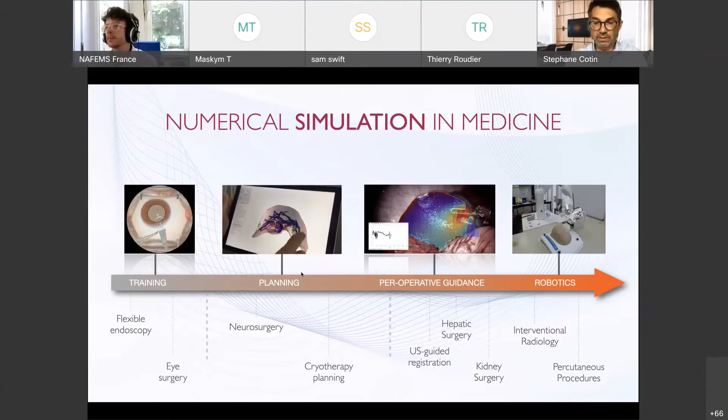Here are some examples of what we do. I took a subset of our research just to show that these different topics can take different shapes and forms depending on the clinical context. But the key is that in many of the applications and problems we try to solve, the main problem we're dealing with is soft tissue biomechanics.

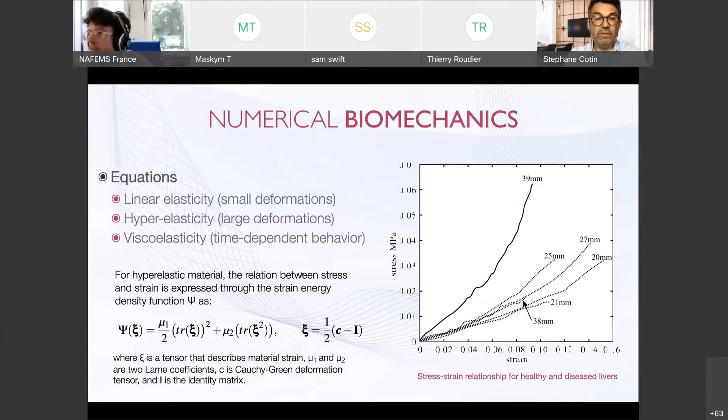Since we are trying to provide guidance in a clinical context, we want to be as accurate as possible, meaning we need to use complex biomechanical laws such as hyperelasticity, sometimes even visco-hyperelasticity. These models need to be parameterized for a particular patient in most of the applications I described, for planning and for guidance. They also need to be as fast as possible, because computation time is key since we always need to be real time with a user in the loop.

Since we're dealing with partial differential equations, our numerical method of choice is the FEM method, where we discretize the domain, usually a complex domain, in the finest possible way. We've tried different strategies in terms of what type of elements to use, but we always face the same dilemma: on one end we need a fine discretization to be as accurate as possible with numerical errors, but on the other end we need to be as fast as possible to meet the real-time constraint.

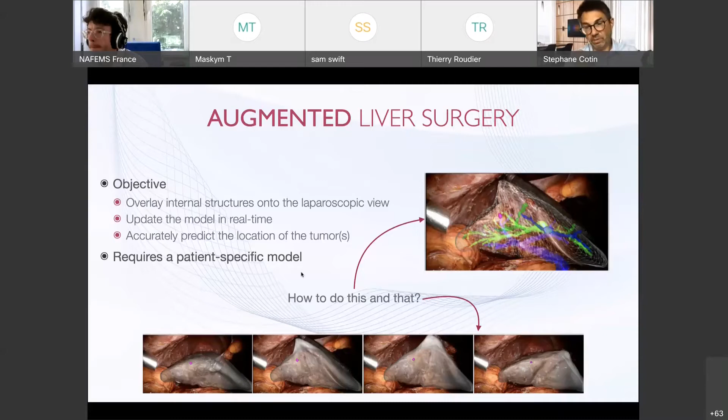That means we need to deform the preoperative model using a very fast finite element approach, and also use information from the image to make this deformation fit what we actually observe. Of course, this requires a patient-specific model to be as accurate as possible. So it really fits the definition of a digital twin, where the idea is to use data from sensors—in our case, most often images—to extract data and parameters for this virtual digital twin, update the model, and in turn use the model to provide added information to the clinician.

So it's basically creating a closed loop feedback where the model learns from data, and the data is in a way enhanced by the model. This link that the twin creates between the physical and digital world is really what we're trying to do in this case.

Since in our case images are our sensors, we need to extract information from these images, and it often comes from either artificial markers that we can place on the organ, or ideally natural texture patterns, or additional information like the contour, the silhouette of the organ.

The key is then to link this information coming from the image to the virtual model of the organ and the biomechanical model. What we used to do was take this information extracted from the images and use it to drive the deformation of the model. This is what's called registration in our field. But by doing so, we're basically applying virtual forces onto the organ that don't necessarily exist in the real world.

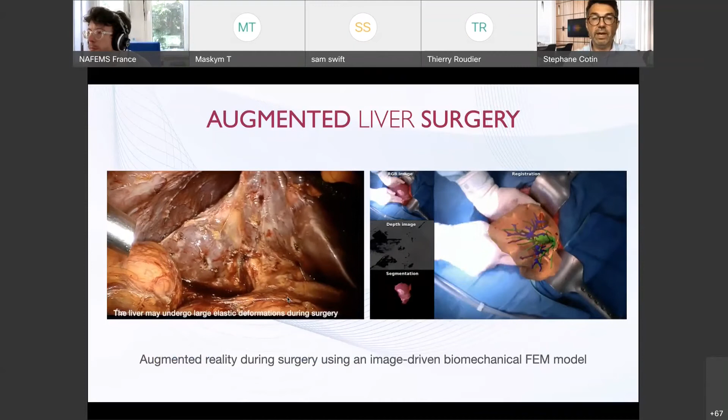Here these are two relatively old images, but videos of two different surgical contexts. One in the case of minimally invasive surgery, robotized surgery. The other one is in open surgery. In both cases, we're using information coming from the images to drive the deformation of the model, but also learn from these images a better parameterization.

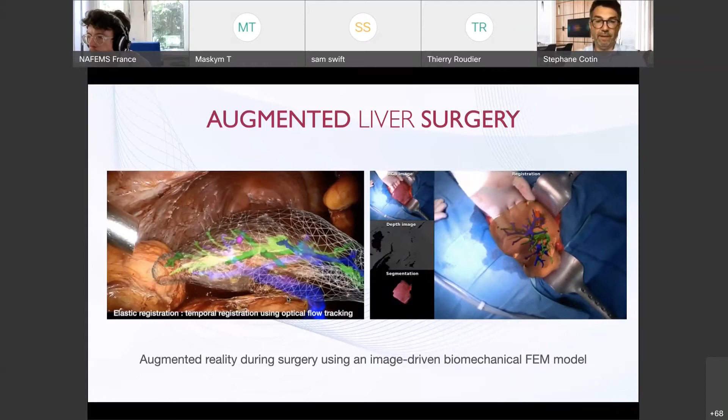Now this is all nice, and we've actually shown through some clinical studies that we can get accurate to about 5-6 millimeters when it comes to estimating, for instance, the location of the tumor. And it's relatively fast, but I would say it's not enough, because the clinicians we work with would like the accuracy to go below 3 millimeters.

And on the other end, if we also want to use these models in the control loop of a robot, we need the highest possible refresh rate of the model, so update frequency. So to try to achieve both objectives, about 4 years ago, we went for a different strategy where we wanted to replace the finite element method with a deep learning approach.

And the reason we chose deep learning is it's a good approach to learn complex relationships. It's also an interesting method because when we look at a particular network architecture that we chose, which already existed before, but we derived it from its initial usage, which is the UNet.

We realized that when we train through a UNet architecture, we're doing something similar to model order reduction. In the encoding path, which is basically the first part of the U, when you get to the bottom of the U, the vector of features we obtain is very similar to the reduced space we obtain with model order reduction. And then the decoding path basically expands back to the original dimension of the problem.

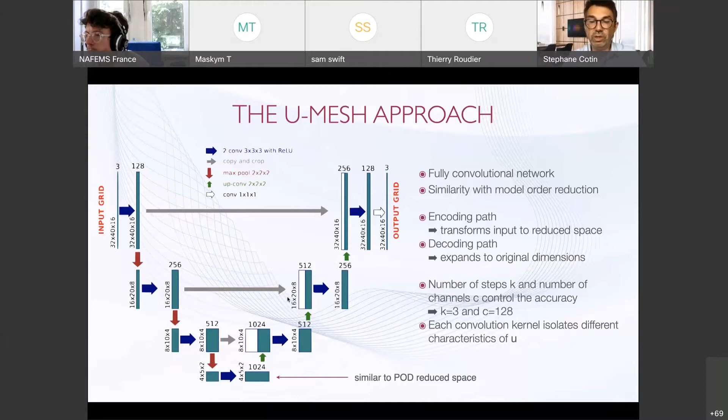So it's very fast, it's quite accurate, and it can really learn a quite generalized prediction in the sense that the only thing fixed in these predictions is the shape and the Dirichlet boundary conditions. For the Neumann boundary condition, you can pretty much prescribe everything you need. The network has been trained on a very large variety of external forces.

It's again very fast and quite accurate. But again, we wanted to go a step further and in particular improve both the speed and the accuracy of the prediction. And we went to a slightly different approach, first by using a different network architecture, which is a fully connected network, which I think gains a little bit in terms of computational performance.

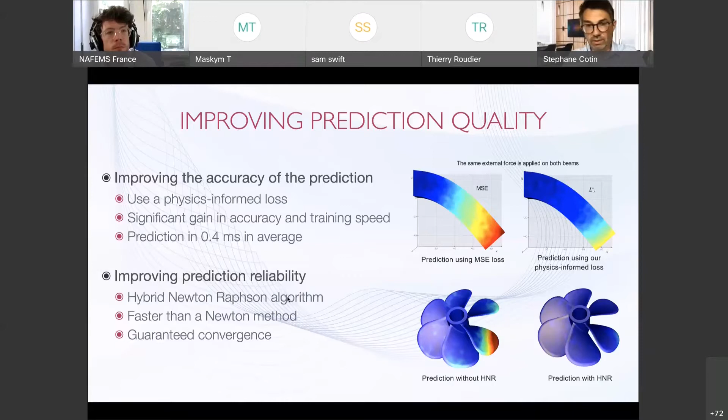So there's many things we can do with this, and this is just the beginning for us. I think that combining physics and deep learning is certainly a very interesting and exciting research field. In our case, what we'd really like to do is improve training generalization, so we can predict, for instance, the deformation of pretty much any liver, not just one liver, at least as a starting base.

We'd like to look at graph neural networks as they provide a more natural link with the finite element method. And of course, we also want to look at the dynamics of deformable models, even though in the applications I showed, it's not necessarily important.

But for a true digital twin, and for our applications as well, we really want to also learn from real data. In what I showed you, we're learning from data generated from simulations. And it's, of course, essential to have these patient-specific models that will also learn from real data.

So in principle, it's relatively easy to do this in other contexts because you can mix synthetic data with real data. In our case, however, although we have access to lots of images, for instance at the time of the surgery, these images contain very poor information. So our challenge now is to find a way of learning from, I would say, poor or sparse data, but in a way that the network still learns something and gets closer to the particular simulation for a patient.

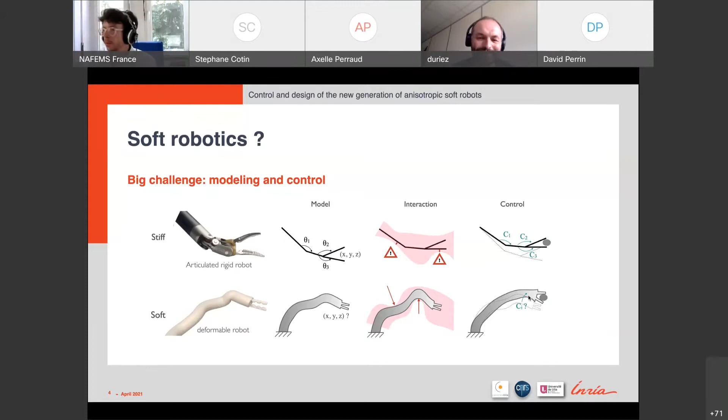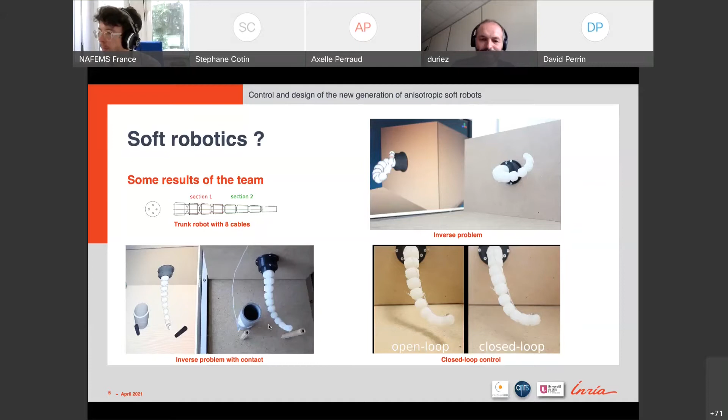Another big thing that we have done, I thought it was a video, but apparently the video is not working, sorry. But we have also developed a closed loop method. Basically you put a sensor at the tip of the robot, and you can avoid having any vibration on the robot using the closed loop.

Now I will talk more precisely on anisotropic soft robots. We are using a mesostructure to design the robot, a metamaterial that is basically printed. There are many examples of this metamaterial, and it's interesting for soft robots because you can control and program the flexibility of the material, and define the good stiffness and mass ratio. Even if it's compliant, you can have something compliant but with a low mass.

Whereas, for instance, the silicone that was used in the previous example has a lot of mass. And you can also create unusual mechanical behavior.

In this work, we also use 3D printed foam. It's a work in collaboration with a team in Nancy that developed this technique of printing this deformable foam. You can basically program the density of your material, but also the anisotropy. The inspiration is the structure of the inside of bones. So we said, okay, let's do soft robots with this material.

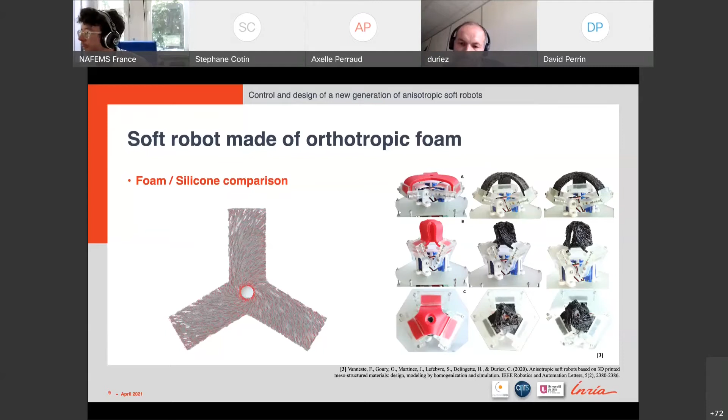Here we show that using the anisotropic foam, you can basically control the torsion of the top of the material forming the shape. You can see that it deforms, but how could we control that? So I will then go into the methodology that we are using in the team in general.

For this particular case of anisotropy, we are using numerical homogenization, and with this homogenization, we can construct the anisotropic constitutive law of the material. This was also done in collaboration with Nancy, where they already did some measurements on their foam to know the corresponding values for the anisotropic case.

We are using the transverse isotropy law, and based on that we can build a FEM model. This is standard for any of our robots. You can use the dynamics if necessary, but it's not always necessary — in that case it was not necessary. Otherwise, you have the external force, the internal force, and a set of constraints that we use for the actuation.

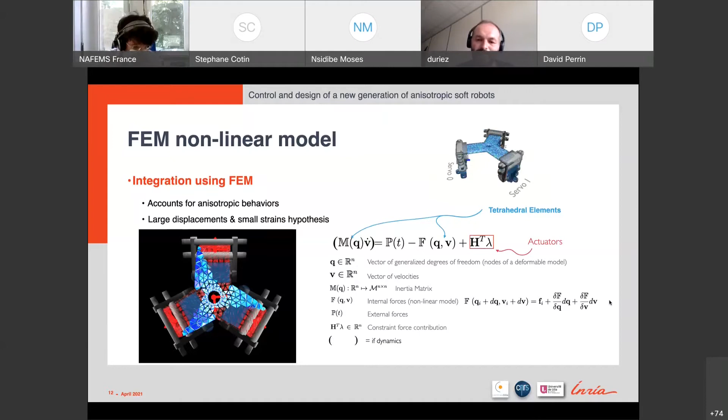For the internal force, we use a linearization for each time step. At the end, when you have done the linearization, you obtain this: for the static model, a matrix A that we update at each step of the computation — this is unknown, and here are the forces that are known. The question is how to control the actuation.

The first thing you can do is impose a torque. If you can impose the torque on your servomotor, you can know how it will deform. But usually that's not what you want — usually you want to do the inverse. You want to pilot the top of the robot and know how much you move the servomotors to reach a position.

It's the important equation in that case: the projection of the motion in the constraint space. We define one constraint for each servomotor, but also some constraints for the effector. Instead of solving the big system, we use a projection in the constraint space — the inverse of the matrix, homogeneous to compliance. So here we obtain basically the compliance in the constraint space, and when we change the force on the servomotors, we can know the displacement we obtain at the tip. This is a small system because, as you have projected everything into the constraint space, you have a reduced system corresponding to the number of actuators and the number of effectors you are dealing with.

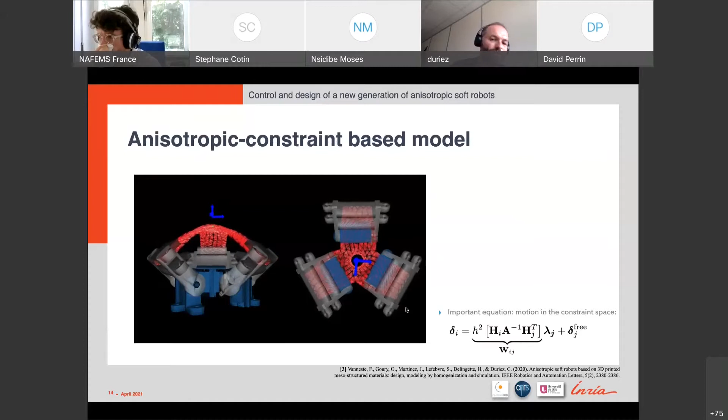So for optimization, it's important, and that's how we build, for instance, an inverse problem. Here we want to control the torque on the top of the robot — sorry, not a torque, a twist at the top of the robot — and given a defined twist, it will find how to actuate the structure to obtain this rotation.

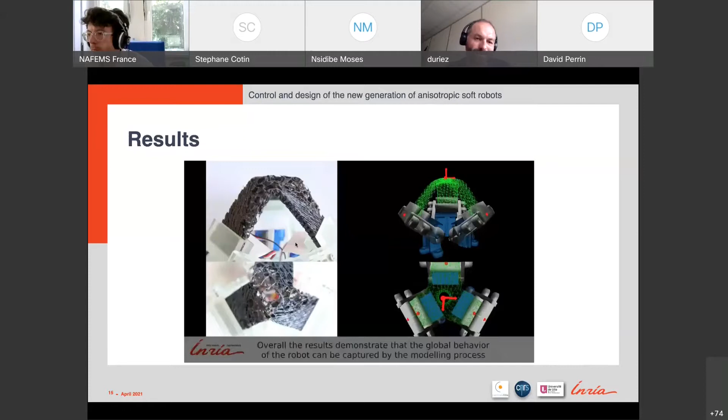So that's how we obtain it. Here the video shows this twist in the robot and the corresponding model. And we went a little bit further on this.

We showed that we can control the kinematics of the robot with anisotropic material. So we took basically 2 of these robots. Instead of having only 3 motors, now we have 6 motors, and we put them in parallel. It's quite classical in rigid robotics to put robots in parallel.

But the thing is that if you do that with silicone, you have 6 degrees of freedom in input, so you can move 6 motors. But in output, you will never be able to control the rotation along the beam - it's impossible because you have isotropic matter. But with our anisotropic foam, we see that if you push in the 2 directions of the beam, you can basically control the rotation along the beam.

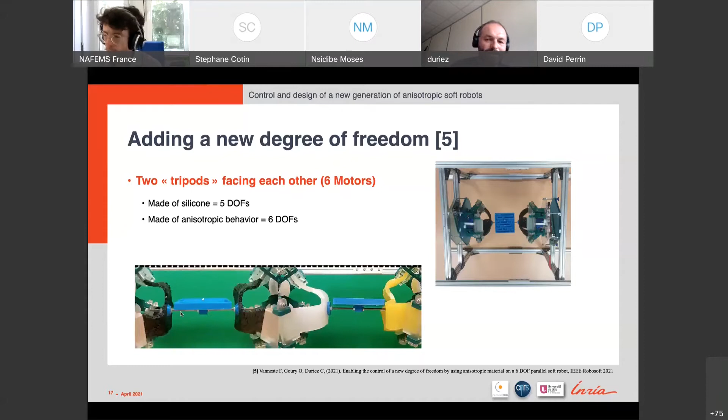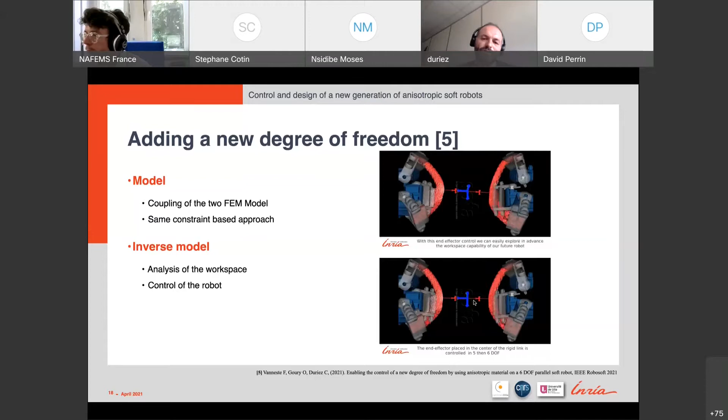So we have coupled that with the model, and with that we can show the workspace of the robot. It's difficult maybe to see in the video, but we move the robot in any possible configuration of the workspace to see where it can go, and have the envelope of all the points that are reachable, so you can see here.

And then, so it really allows us to have an analysis of the design. Basically that's this. So I wanted to show you this anisotropic soft robot because I think it's a very funny way of building robots. We have shown that what is really new in robotics is that you can play with the material to change the kinematics, and it's completely new in robotics.

It's maybe obvious for people doing structural mechanics, but usually in robotics, when you have defined your kinematics, it's never influenced by the material you are using. So we have demonstrated that with the 6DOF parallel soft robots. We see that modeling is a key point.

And now we are working on the calibration, because when you print the robot, you have some difference between the material and the model - the printed robot versus the model robot. So we want to have a way of calibrating the model, doing design optimization, and in more future work, longer view, we would like to have a smart material where we can have influence on how we print the robot, but also adding sensors, electronics, actuators inside the robot.

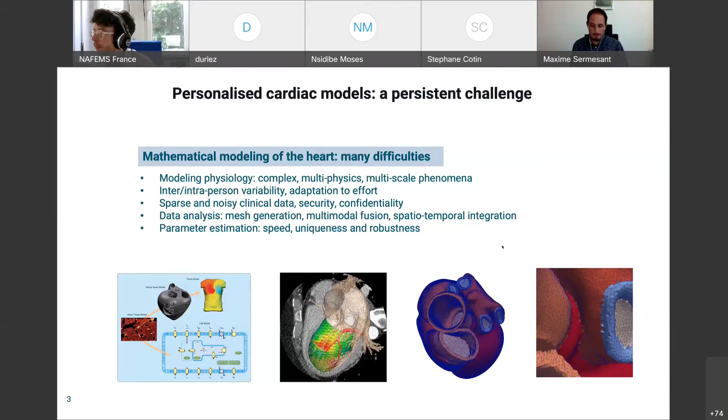In terms of cardiac models, in recent time the trend was mostly to go for more complex models, adding more equations to include more phenomena, thinking that if you are more realistic in terms of the number of phenomena, then the global model is going to be more realistic.

But given all the complexity of the equations and how to solve these on very fine meshes, we believe that maybe another approach, where you start more from the data you have, which will guide what you can estimate as parameters, and then design a model compatible with such data, could be more interesting for clinical application of such models.

So I will present you some results on two main pathologies: cardiac arrhythmias and heart failure.

First, for cardiac arrhythmia, that's a pathology of the electrical part of the heart, when the electrical wave that controls every heartbeat gets into a chaotic mode. There is a therapy called catheter ablation, where you can go inside the heart and burn the cells responsible for such pathological behavior.

However, it can be very lengthy, 6 to 8 hours, and there is still a lot of recurrence, so people have to come back for another intervention because success was not achieved at the first one. One idea is to build patient-specific models from the available data so that you can test and validate interventions before performing them on the patient.

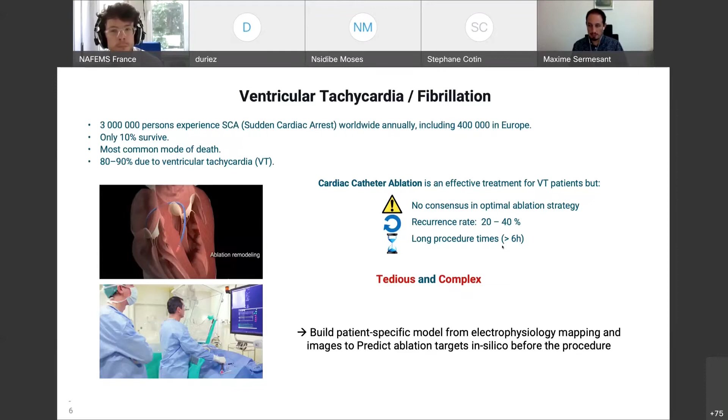To do this, there are again a lot of different models, and we tried to see where we could go with the simplest models possible. In the case of wave propagation, this is the Eikonal model, which just simulates the time of arrival of the wave and not any electrical potential.

We could show that using such a model, you can have a very fast simulation of the propagation of the electrical wave, only based on imaging data. For instance, here we show how we're using the thickness of the heart, which can be measured directly from CT imaging, to estimate the propagation parameters of such models, and in a few minutes, initiate the activation.

And we could compare this to invasive measurements from catheters, with very good correlation between the measurements and the simulation.

Then we move to a more complex simulation scenario where we want to simulate the whole procedure of ventricular tachycardia stimulation, where cardiologists put a catheter in the heart and pace it faster and faster to see whether an arrhythmia will develop. For this, we need more complex models, using reaction diffusion equations, for instance.

The Mitchell-Schaeffer model is a two-variable model, which is quite well suited for such simulations. And we could show that by estimating parameters from some measurements, we could also predict the arrhythmia that was induced in this patient.

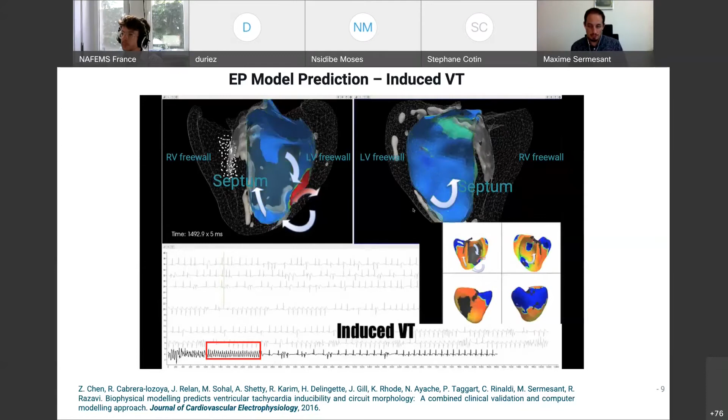If we compare in 2D, which is maybe simpler, when we project the activation, we could see that on the left is the activation of the pathology in the patient, and on the right is the one which was predicted. It's very similar in terms of circuits.

So what is the pathway that will be followed by the pathology? We could do this also in another patient, but it's still a very long procedure to estimate these parameters and simulate such models. And the data we used here was quite invasive, because we already needed invasive measurements from catheters to do such patient-specific models.

So we tried to move away from such invasive data and use only imaging data. For this, the idea is to use directly the wall thickness, as I already mentioned.

So when the heart is very thin, it's probably that there was an infarct, and the muscle is much thinner than it should be.

So we propose to use the lattice-Boltzmann method to simulate the reaction diffusion equations on the Cartesian grid of the image directly, and learn the relationship between this wall thickness measured in images and the electrical parameters of the model. We could show that it enables a realistic simulation of the electrical activation in the heart.

Here you can see the stimulation protocol simulated. At some point, it starts circulating around the black area, which is the infarct area, and that's when we predict a given ventricular tachycardia. For this patient, the same tachycardia was measured with catheters. So here, in a completely non-invasive way, just using imaging data, we could predict the pathology in such a patient-specific manner.

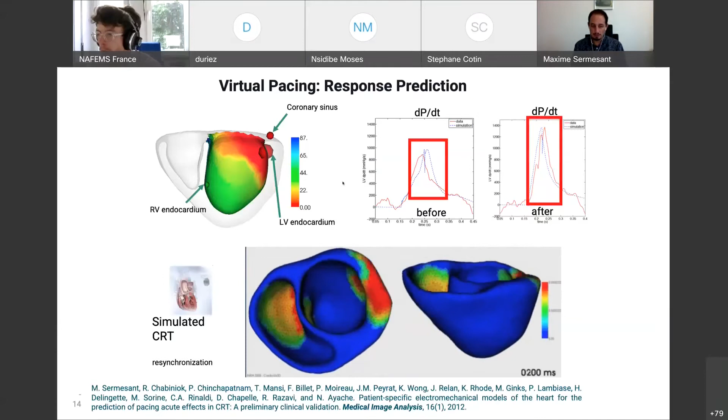So these are the works we did, but still, it was very long and very sensitive to noise to have very complex models integrated on the heart scale, with the electrophysiology and the mechanics.

So we proposed to have a more compact model for mechanics, because actually in measurements, what you get from imaging is mostly regional. You don't really know a point-by-point motion, but at the region level, a few centimeters, you can measure the deformation and displacement. So we propose a finite element approach which relies on regions, where for each region only an affine transform is used, and then there is a mixing function in order to compute deformation at any point.

We could show that this drastically reduces the number of degrees of freedom, but we believe it can still reproduce quite realistically the cardiac motion. So we are trying to see if such reduced models can be more efficient and more robust when estimating parameters from clinical data.

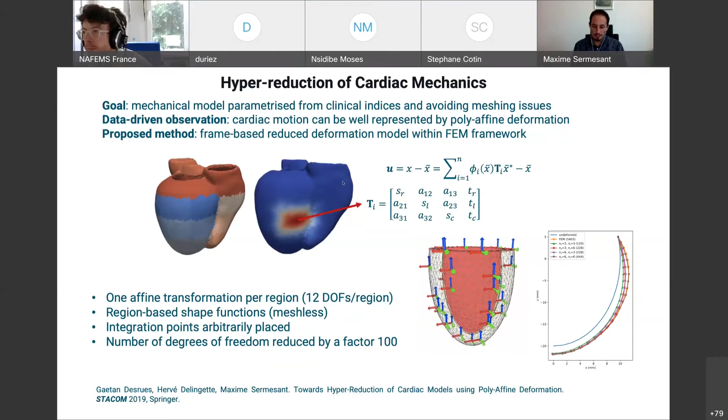But the next step for us after working on patient-specific models and trying to reproduce pathologies and therapies was to see: can we go further, even use such models in order to help develop new therapies?

So there was this call from Europe about accelerating the uptake of computer simulations for testing medicines and medical devices. We submitted the SimCardioTest project to demonstrate the feasibility and effectiveness of such an approach for cardiac devices and drugs. There's of course important work of interacting with regulatory bodies, physicians, and companies, so that such an in silico approach is really accepted by all the stakeholders. We hope such an approach can also help healthcare innovation pace and get more therapies for patients.

So the approach is to develop a cloud-based platform so that in addition to the current experiments and clinical trials, it's possible to test in silico, using this cloud-based platform, different designs of devices and drugs, and get from these simulations enough information so that it can support the certification of the devices.

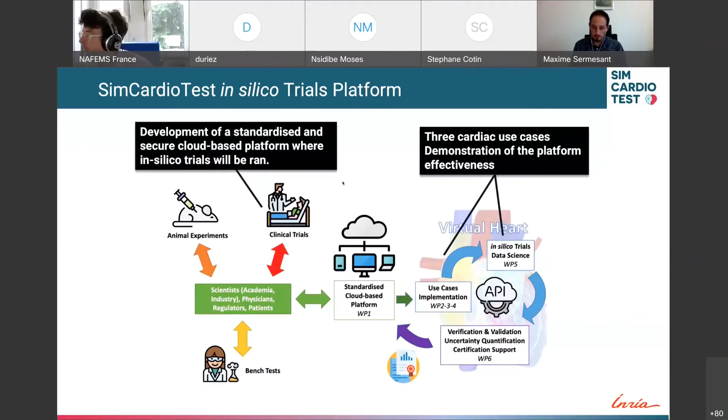So we have three use cases. The first one is on pacing leads and catheters, where we're going to use a mix of in silico and physical simulator so that we can validate the navigation of these devices.

We want also to be able to simulate the capture. So when you use a pacing device, there is an energy threshold above which the heart will actually be excited. And it's quite difficult to predict this on simple experiments. So we believe that detailed simulation of cardiac tissue can help.

And also the fatigue. I mean, these devices are implanted for 10, 20 years in the human body. So it's very important to be able to predict the fatigue and the risk of rupture, but it's also difficult to test in realistic conditions with a motion which is close to cardiac motion. So again, a mix of physical soft robots like what Christian presented and simulations could help us providing better testing.

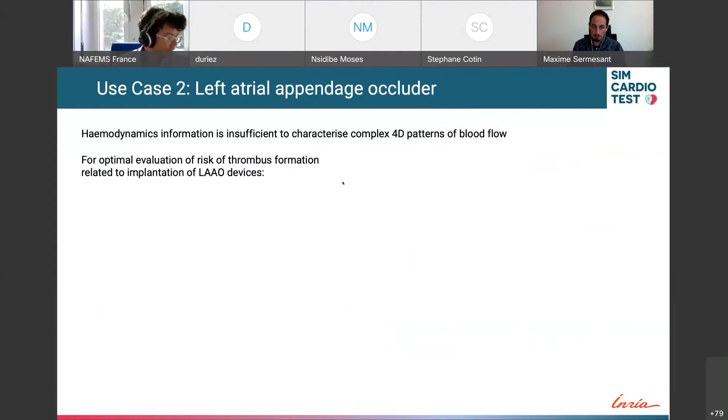The second use case is about thrombus formation and the risk of stroke. So in the atrium, there is this appendage where the thrombus can be formed and then has a risk to go to the brain or anywhere in the body.

So there are new devices to occlude this appendage so that there is no risk of thrombus from this appendage going to the body, but it's still a complex device, and to know which patient will benefit from it is still difficult. And how to optimize the positioning and the design also of such devices is very difficult. So again, we'll use in silico approaches to help the design of these devices and predict the response to the treatment.

And the final use case is about cardiac drugs. And there is a very important topic of potential efficacy of these drugs, but also safety and potential cardiotoxicity. Because any drug that impacts the electrophysiology of the heart can increase the risk of sudden cardiac death.

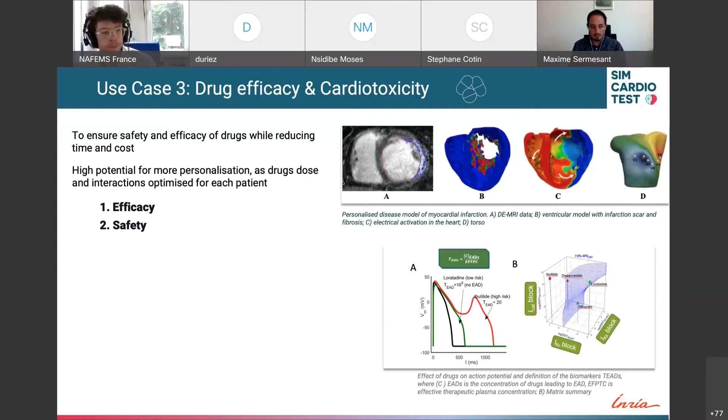So there are ways to test in silico how much a drug impacts the electrical potentials and verify that it's safe to be used. And also, for instance, in oncology, there are different chemotherapies which were shown to have an impact on cardiac function. So we would like to see if in silico approaches can help also predicting such cardiotoxicity.

So the ambition is to create this unified and standardized platform where people can connect and test different devices and drugs. As you know, I believe the combination of in silico approaches and high performance computing can really help in this approach.

So there are still improvements to be done on the modeling part. So for the first years of the project, we're going to finalize the different models we're going to use. And then we're going to integrate them in a cloud-based platform and also propose more data science-based approaches to explore the resulting data.

If you do a real clinical trial, you don't have many output values to analyze. But if you do an in silico trial, you've got a lot of output from the simulation, so you can explore this for maybe discovering new biomarkers.

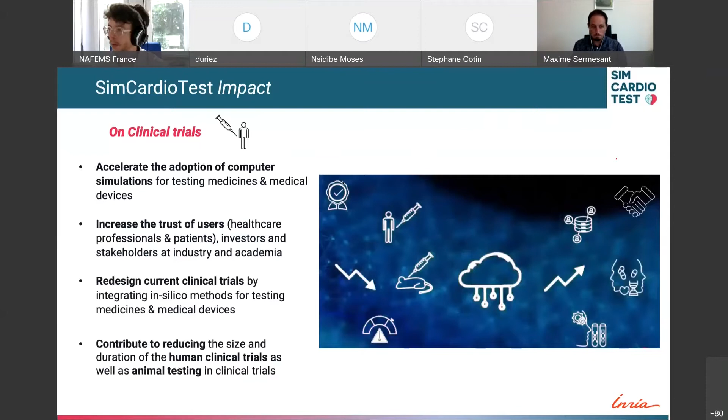On the regulatory system, there's still a lot of work to be done in order to be able to use more and more in silico information when going through approval, and we believe that constant interactions with regulatory bodies should help in co-designing how in silico can help such aspects.

And finally, we can see that the rhythm of new innovations in healthcare is really slowing down due to the huge cost of design and trials of new products. So we hope that the in silico approach will help in reducing the time to market and helping design these new devices and drugs.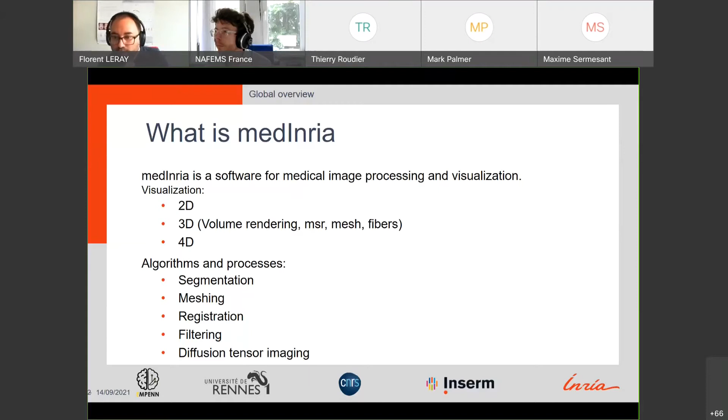We are developing MedInria as a software platform aimed at providing research clinicians with medical image analysis tools coming from research. This software will progressively include developments coming from 3 of the major teams in medical image analysis at Inria: Epione, Athena, and Empenn, making it a future major diffusion platform for our research developments.

Each team has a specialty: diffusion imaging and EEG for Athena, imaging biomarkers for understanding and monitoring brain and spinal cord pathologies for Empenn, and cardiac modeling and computational anatomy for Epione.

MedInria goes today beyond Inria. It's a platform for international research teams, clinicians, and collaboration with industry. The community is polarized between academics or medics and startups or spin-offs. We are hosted and supported by Inria, and we are in close relation, for example, with APHP on different projects for medical image segmentation. Many startups or spin-offs use or rely on MedInria, like Therapixel, inHEART and Rebrain.

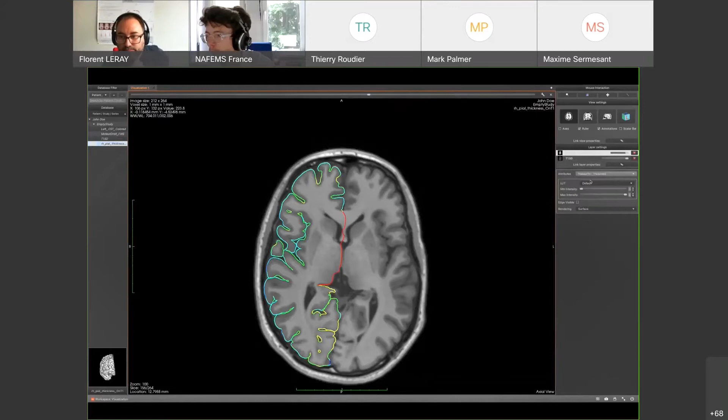We add a mesh overlying. We switch the orientation. And now you can see a 3D rendering. You have the MRI with an MSR representation and the mesh in 3D.

We drop fibers data. We have a good superposition of fibers, mesh, and MRI. Come back in 2D, and finally we add a mask. You can see the mask on the right.

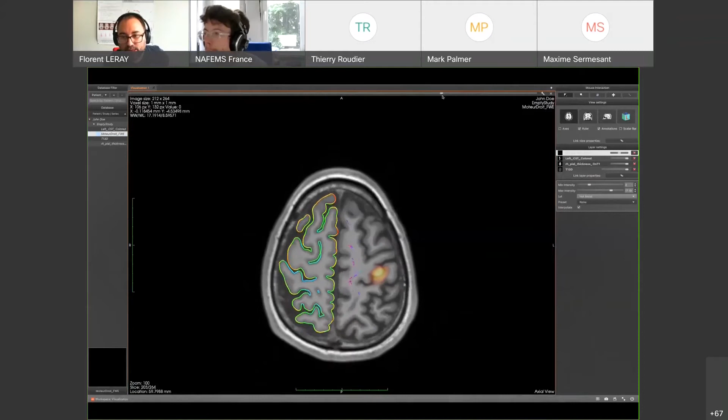Now we look at the visualization workspace in a short video to exhibit 4D MRI and superpose a 4D mesh. You can see the heartbeats.

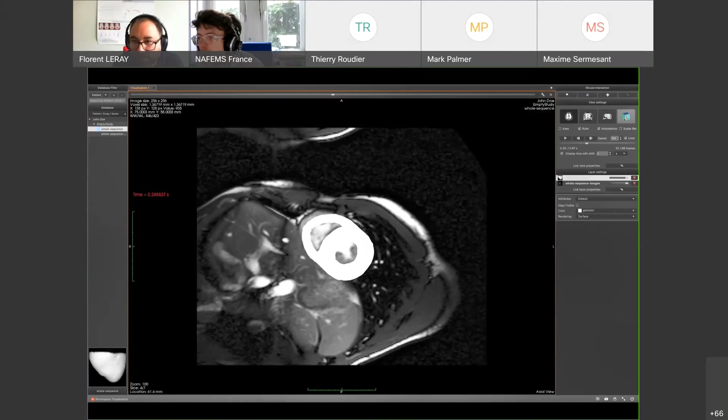We drop a 4D mesh. The MRI and simulation mesh are beating together in 2D. Now we switch to 3D, and you can see the mesh and the MRI beat together.

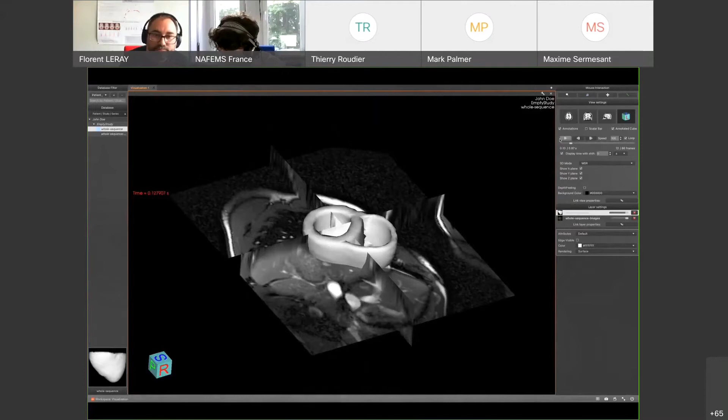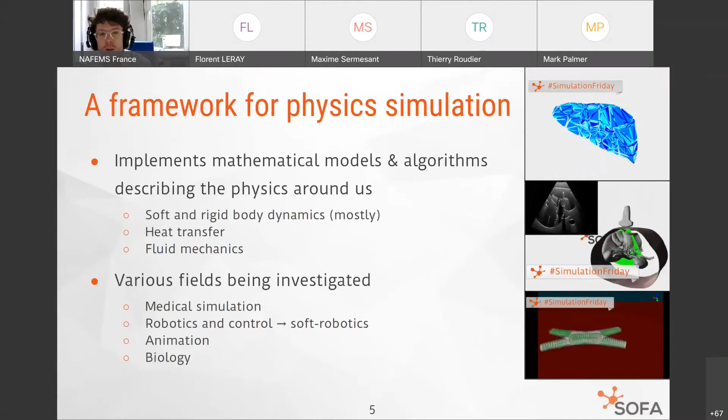So that's really the main topic of SOFA: soft and rigid body dynamics, in various fields already being investigated - medical simulation, soft robotics, which is way more recent, just a few years old, really a rising topic for us, animation like computer graphics, and biology.

Since the very beginning, the development of SOFA followed 4 keywords as a concept. First, it has to be flexible. The way you define your simulation, using XML script or Python scripts now, had to be flexible, efficient - we wanted an easy design of simulation.

Second, we wanted a modular architecture. This is because we follow an open core architecture, with an open source core and optional plugins around it that you can activate or deactivate. Efficient, using multi-threading, GPU computing - efficient enough so you can have interactive simulation, so the user can get into the loop, objects can interact with one another, and the simulation remains interactive. So that's the 4 keywords: flexible, modular, efficient, and interactive.

The code structure follows the concept of open core. You have a core of code written in C++ under the LGPL license, meaning you can download, use, modify, and even make a product freely based on SOFA. We provide regular releases from this open source core, and around it you have optional features - that's what we call the plugins.

That's where research teams are developing their algorithms, where companies are developing their algorithms, and independent developers too. Basically anyone can create his or her own plugin, and on those codes, the license is free to define.

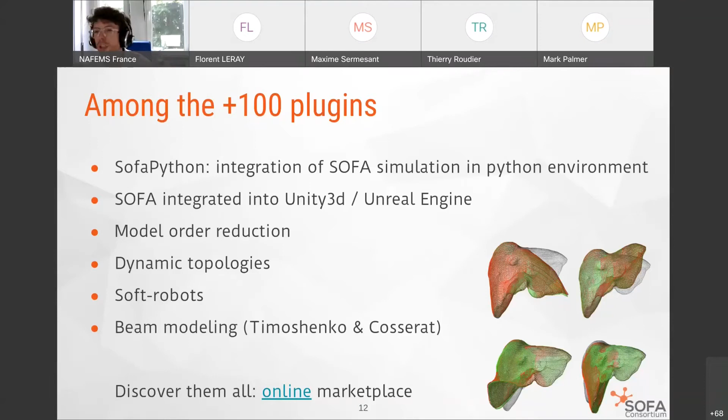So a very short hands-on session. I'm going to share another window here—a SOFA window just for a second. I opened a scene here in SOFA, and what you can see here is the typical SOFA view, live.

So we have an object—I'll just show what. Yeah, we have what we like to use in SOFA, a liver. This liver is deformable; I can actually pull on it and so on. That's the user interaction I was mentioning. It's a very coarse model, but anyway.

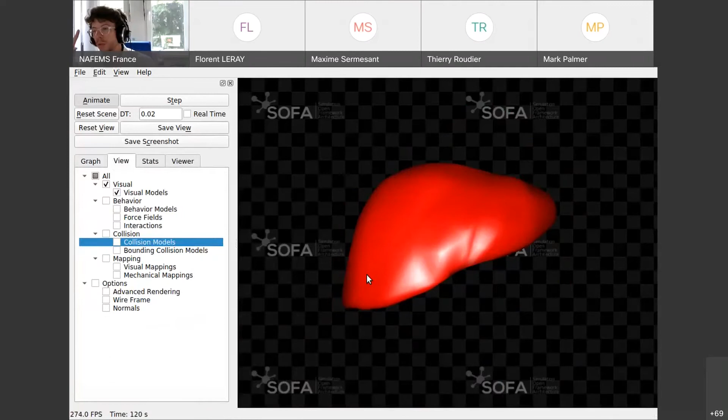And as I mentioned before, we are decoupling the different visualization model, the physical model, and the collision model. Indeed, here for the rendering you can see we are using a triangulated mesh, just a surface mesh—that's the one we use for rendering. But the one for rendering is completely different from the one used for the physics, for the mechanics. The mechanics is computed over this volumic tetrahedral mesh here, this blue mesh.

And finally, for collision, we are not using a surface mesh, but instead a series of spheres that will detect if an object is colliding with those spheres. So you see, this way, we are really defining and deciding where to put the computational efforts in SOFA.

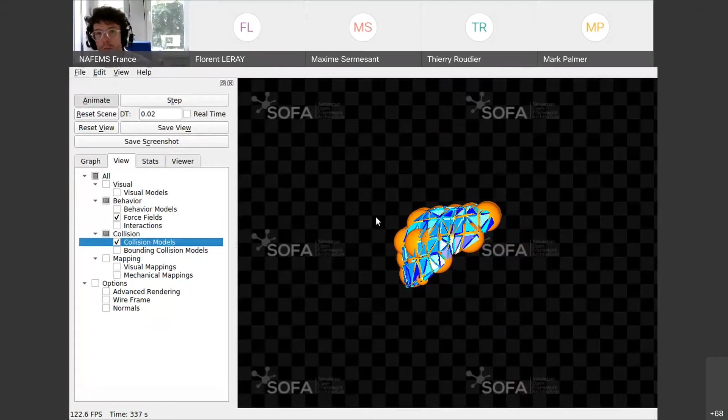And in Python, you can even do more, because here I started the simulation, and I can just, with keyboard interactions or any kind of interaction, add new objects. Those objects, the rigid spheres, were not existing at the beginning of the simulation—you can see here, they were not existing. But as soon as I trigger it, just with a keyboard but it could be any kind of triggering effect, you can create new objects or change the physical properties of objects while the simulation is running.

So I'm going to get back to the slides and conclude for this part of the presentation. There we are.

During the 15 years of development of SOFA, there have been more and more developers, so daily contributions. Now the way we are actually working is following a strict protocol, working with a versioning system, Git, hosted on GitHub. You can find all the code of SOFA at this GitHub address here.

To contribute, people are actually making what we call pull requests. It's a proposal of contribution, peer reviewed by developers every week. This allows us to follow a stable development process, and that's what gives the stable releases every 6 months.

Who defines the roadmap? The technical committee, where we have partners deciding with us where the software is supposed to go, and what will be the future developments.

Among these 15 years, actually just in the last 10 years, we have also 7 startups that have been created around SOFA. That's the reason why we decided with this ecosystem to create a consortium, an open source consortium, to handle the maintenance of SOFA, coordination of the development, taking care of the animation of the community, and ensuring the growth of the ecosystem as a third party at Inria.

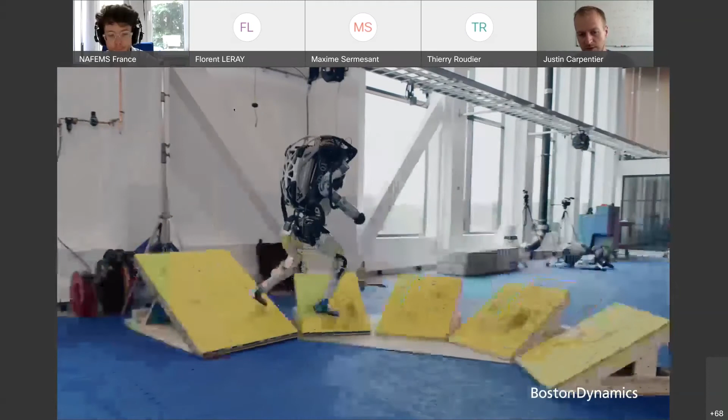I will start with a motivation example, this one. I think everybody has seen this video so far. This is a very strong robot, but very rigid. What makes this robot very robust and efficient is mostly due to the fact that it is able to anticipate, in the few upcoming seconds, the world motion. For that, they are using optimal control, model predictive control.

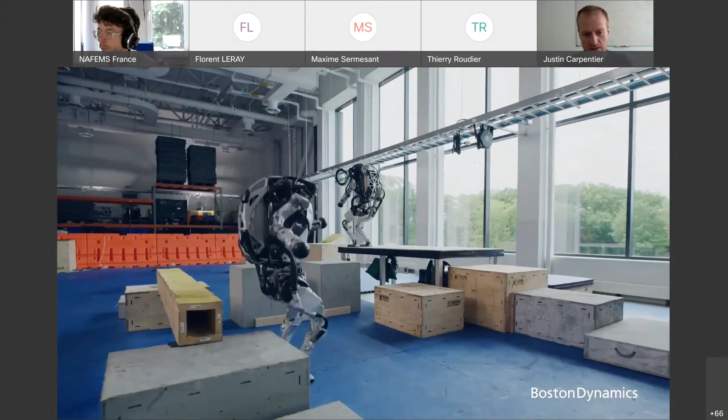And what we need to do for that is really to compute, in a very efficient manner, the dynamics of the robot interacting with the world. For that we need a good and strong physics engine, which is able to compute at many kilohertz the dynamics of the robot along the life of the robot.

The dynamics of this robot is governed by the so-called Lagrangian dynamics. Everybody knows a bit these equations, but this is another way of formulating the dynamics along with Newton's formulations. Here we have a polyarticulated system, with gravity.

The purpose of Pinocchio, and of many algorithms in robotics, is to efficiently compute these equations, either in forward mode—forward dynamics, given the position, velocity of the joints, the current torque applied, and the contact forces, we compute the acceleration of the joints—or the reverse, called inverse dynamics, where from a given output trajectory we compute the torques that produce the motion, by either inverting or computing the forward of these equations.

The whole motivation is to exploit at best the sparsity pattern produced by these equations of motion, which mainly lies within these quantities, induced by the kinematic tree that is proper to kinematic chains like humanoid robots that we have seen so far.

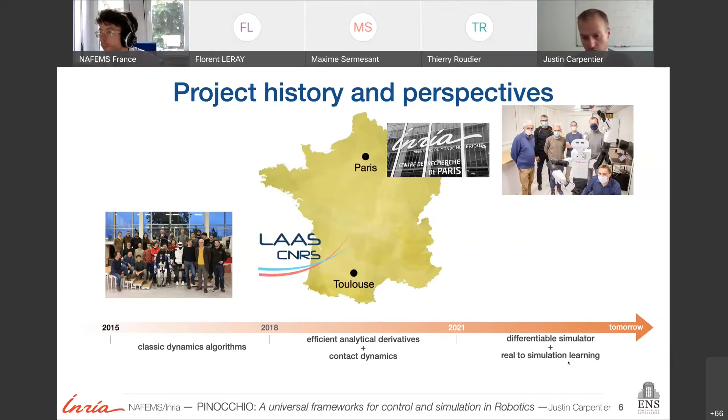Currently we have many users coming from academia or industry: Airbus, PAL Robotics—a European leader in building robots in Europe—Wandercraft, a startup in Paris building exoskeletons, Bosch AI, and also Arrival and Covariant, which are spin-offs working on AI for the automotive industry or AI for manufacturing.

The Pinocchio library, at first glance, implements the classic algorithms in the literature. We support a large number of joint topologies to depict the kinematic tree of our system, and we exploit at best the sparsity of the system using the so-called Featherstone algorithm.

We implement the classic algorithms mentioned so far—forward and inverse dynamics—but also more advanced rigid body dynamics algorithms currently being developed. We're also able to deal with Lie group formulation, which is essential if you want to work on the real geometry of your problem.

We also implement analytical derivatives, which is essential if you want to be fast computing predictive control solutions to drive the motion of your robot. This is what makes, for instance, the Atlas robot from Boston Dynamics work very agile and acrobatic, performing acrobatic maneuvers.

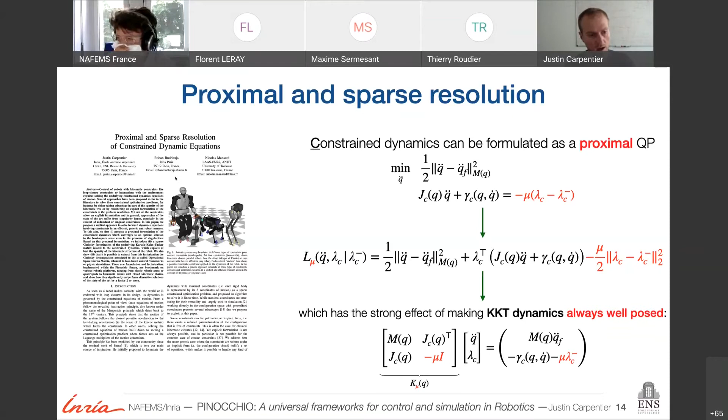In addition, we have been working recently on improving all the rigid body dynamics algorithms to deal with constraint systems, using what we call proximal reformulation. I won't go into the details, but if you want more, you can check this paper. There is still research to do, and we are trying to do this research together with the implementation within the Pinocchio library to make it available for the world community. I think this is essential if we want fast transfer of our research towards industry, because new robots need this feature.

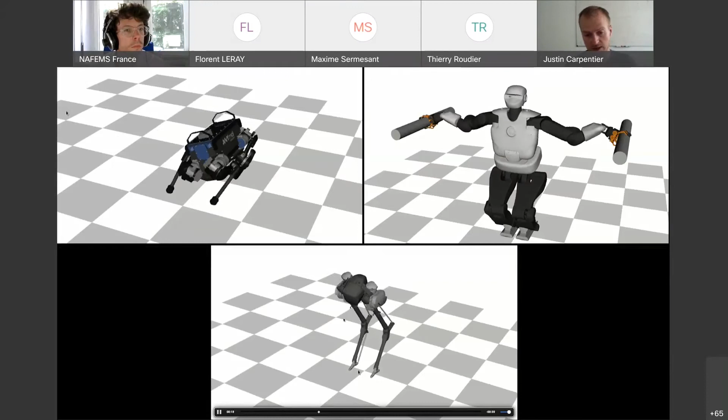This is, for instance, some animation using this algorithm on most standard robots. Here we have a quadruped robot, the Talos robot from PAL Robotics, and also the Cassie robot from Agility Robotics. Both these robots suffer from contact constraints or loop closure constraints, like this one on the Cassie robot. All our solutions are able to run on this platform in a very efficient manner.

So the whole goal of Pinocchio is to be versatile, I mean, to be able to operate on all the rigid body robots that we currently have.

In addition to that, as I mentioned earlier, if you want to do numerical optimal control or reinforcement learning, you need to be able to compute derivatives. We have implemented all these derivatives within the framework in a nice manner, which means we are able to evaluate the function and compute the derivatives at the same time, without too much additional computational burden. This is essential if you want to be efficient and get gradient information needed for first order or second order optimization methods.

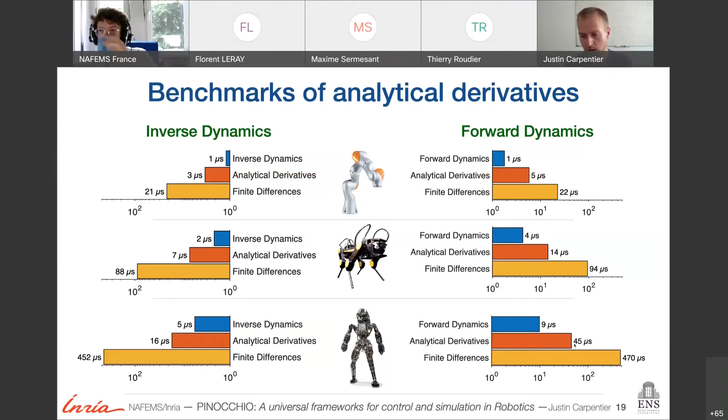Here again, some timings. If we were using finite differences to compute the forward dynamics derivative on Talos, for instance, it would take more than 400 microseconds, while with analytical derivatives it's 10 times lower. These timings came from 2018, but now with new computers and new implementation within Pinocchio, we are able to divide all these timings by at least 2.

This is an illustration of using Pinocchio for optimal control. This was done by Carlos Mastalli, showing athletic motions with the Talos robot. This motion is very easy to compute thanks to these derivatives.

So what is the future of Pinocchio? What we are planning to do is to port Pinocchio on GPU and FPGA code source generation, because a lot of people are asking for this feature, and this is very essential if we want to have embedded models within robots and to increase their autonomy.

So we are working on more constrained dynamical systems. We are building an open source robotic simulator to replace MuJoCo or Bullet, which are not suited for our research. We are working mostly on a fully differentiable simulator, which is essential if we want to learn new contact models, and to improve the quality of our simulator from sensor data. We're also working on supporting biomechanical systems for biomechanics, and on code generation of robot controllers. We're also trying to improve the collision detection algorithms used so far by the community through the FCL algorithm.

And in the future, we have new software coming alongside Pinocchio: an efficient and differentiable convex optimization solver for control and learning, which we will provide soon. We are working on new software for online model predictive control of robots, and also, as I mentioned, the differentiable simulator. This is a feature I think is missing in the wider community, and which can also benefit the SOFA framework, for instance, to learn contact models. Thank you very much, and I'm pleased to take questions.

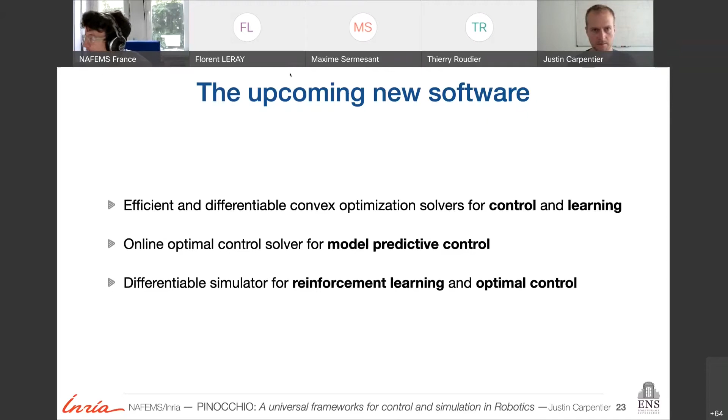Thanks a lot, Justin. Is there any question in the audience about Pinocchio and all the possibilities and future possibility of Pinocchio? As we said earlier, you can post everything in the chat. What I suggest now is that I'll give you just one minute if you need time for asking questions. Otherwise, we're going to move into breakout sessions, just like before.

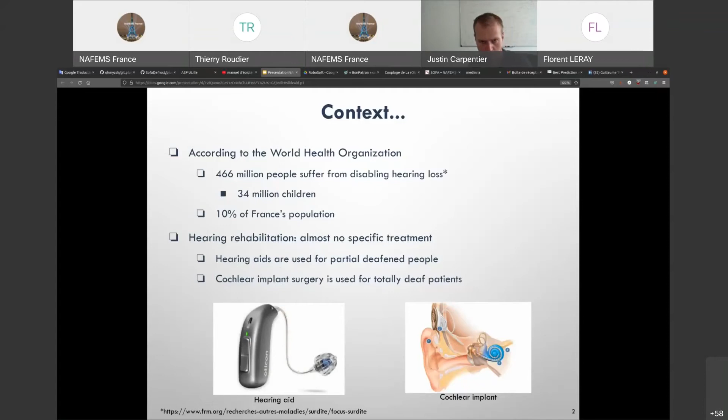What's a cochlear implant, how does it work? Unlike the hearing aid, where you have to amplify the sound, for the cochlear implant you have to operate and install this device, which contains the microphone, the speech processor, the transmitter, the stimulator, and the electrode array, which converts the pulsation received from the stimulator directly to the nerves related to the cochlea. What is important here is the positioning of the electrode array, the implant, what we call the implant.

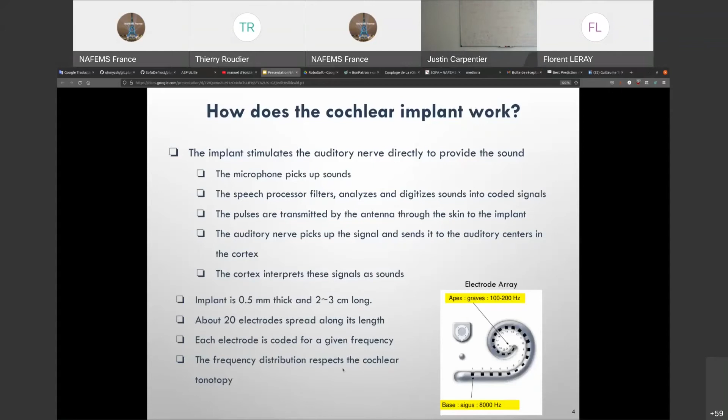The position of this implant is very important during the surgery, because this implant has an amount of 20 electrodes, and each electrode is coded with a given frequency. So it's very important to have a good positioning of this electrode.

But the main difficulty of the operation is the fact that the implant, apart from the rigid part, apart from the electrode which is rigid, the implant is very flexible, very soft. During insertion, the insertion is performed manually, and the surgeon doesn't have any perception of the cochlea. He just has to push it, and afterward check if everything is fine.

This leads to this kind of operation where the implant gets blocked inside the cochlea. We also have this kind where we have incomplete insertion, and sometimes we have complete insertion. But this kind of insertion just leads to poor postoperative speech performance, and sometimes it can cause some trauma for the patient, or damage to the membrane or something like that.

For Oticon, they asked us to propose some simulation tools for them. First, to analyze and modelize the cochlear ramp, the basilar membrane, the cochlear fluid for the first part. Also do the same thing for the implant. Then they also need something to measure the friction force between the implant and cochlea during the insertion.

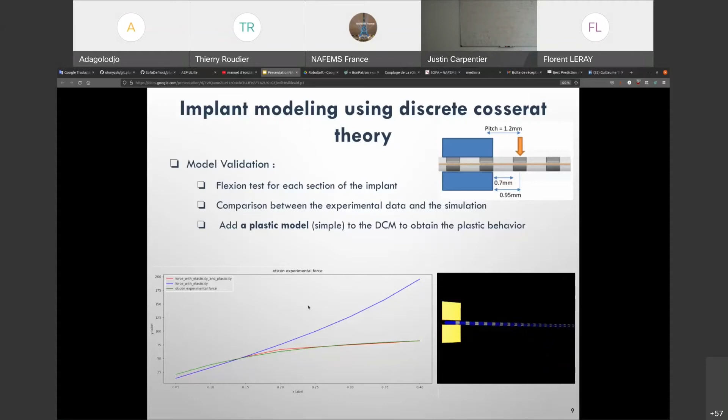The second part from them is to test what we have during the insertion. Then they have this kind of simulator. We have the same shape as cochlea, but the thing here is, as you can see, this cochlea is not deforming during the insertion. The only thing which deforms is the implant.

Then they ask us also to do this kind of test. Here they put the sensor at the base of the implant, then to measure the force during the insertion. For us, the main challenging part is to go from the reduced coordinate in Cosserat to the global coordinate, where we are modeling the contact and the friction and so forth.

Then for that, we do the same thing. This is the simulation result. I hope I can share it. Okay, I will go to my drive. I think I have the videos here.

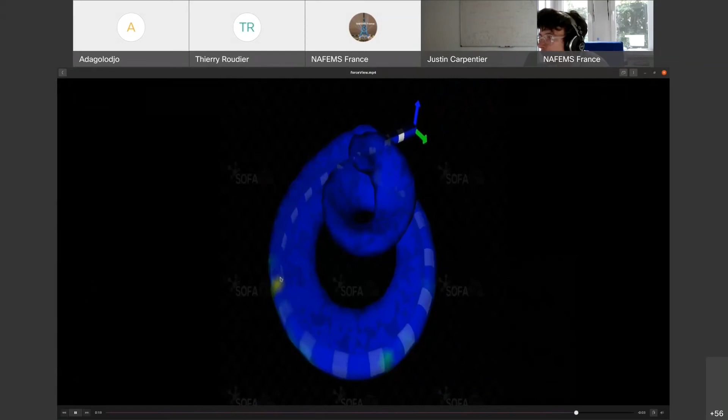That's the simulation we are doing for that also. And this is this one video I can play here. But this is another view of the video, right? Here I can show really the contact force, what I showed in the same.

Then for this also, we compare the force we got from the simulation to what they have in the real application. In green here you have the result from the real application. Then for them it's very important to know from different directions of insertion.

We do also the same simulation for size S, and for size S we show that we are not able to complete the insertion using the actual implant they have, because this implant has 25 millimeters of length. Then we show that we cannot perform the complete insertion from there, and that's what they got in the real application also. For them, it was very interesting to see that the simulation is able to show that.

And thank you for your attention. I don't know if you have further questions, I didn't show all the results, but I think I'm over time.

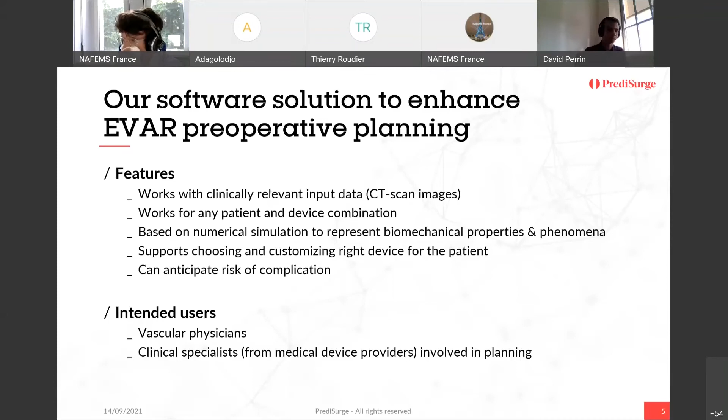So I will present you the main steps inside our software. First step is to get the vessels and get a mesh out of that.

So we built a module where the user is able to look at the preoperative CT scan of the patient, to do regular analysis of the CT scan, like a measurement to get the standard views he is used to.

But in addition to that, the user can also generate segmentation of the vessels. It's semi-automated, it doesn't require any kind of knowledge about segmentation, just to select the right organ on the scan. And then we also have automated vessel surface meshing.

That can then be validated by comparison to the CT scan. So we have an overlay of the surface on top of the CT scan to ensure that our mesh is well representing the vessel surface.

Second step is dedicated to the device itself. So in this module we have the setup of the main parameters of the geometry of the device. For example, for a stent graft, usually you have a number of diameters and lengths of the body that you can input. You can also put the number of stents that you have on the device.

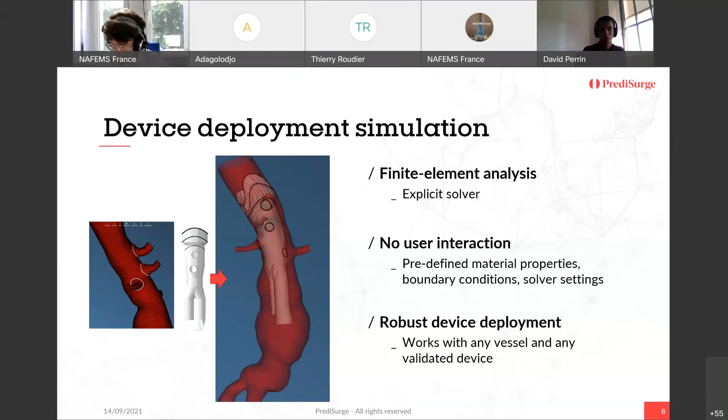And the methodology that we use for that is quite robust, since it can theoretically work with any vessel and any validated device, but it's really working well. We've applied this methodology to hundreds of patients and it's working really well.

Finally, we go to results and analysis. So from this simulation, what you can get is a 3D visualization. In the software, you can also get an export of the device design.

And since using simulation, you can customize your device. If you are not happy, you can change some parameters and run another simulation to validate that.

So you can get an export of your device scheme drawing, so that, for example, a physician can then give that to the medical device provider for manufacturing the device.

And in addition to that, we have a collaborative web platform that can be used to share results amongst people who are involved in the planning. So, for example, you can have different physicians involved, some proctors. You can also have clinical specialists, so all of them can gather on the web platform to get access to the 3D visualization and also to all other documents.

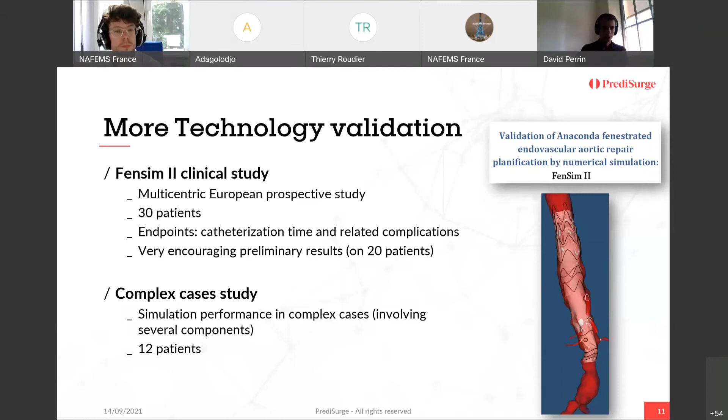In conclusion, we've built software able to perform patient-specific numerical simulation to support planning of cardiovascular interventions. It's a tool for physicians and clinical specialists that allows faster planning than conventional methods, with at least as good stent graft design. We have more studies ongoing to evaluate the real impact on clinical outcomes, but we think such tools can reduce complications and the time needed for intervention.

We can do much more than preoperative planning, and we also think to enlarge the application to other cardiovascular interventions, including endovascular repair of aortic aneurysm. Thank you all for your attention.

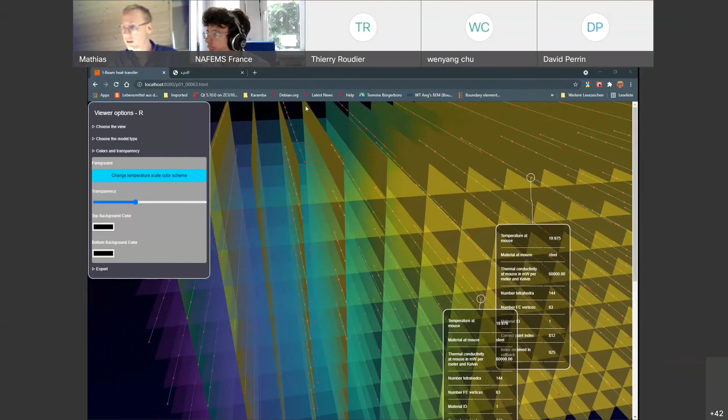Okay, so that's my short pitch. Let me quickly go back to the other slide so that you can see my email. It would be cool if you drop me a line and let me know what you think.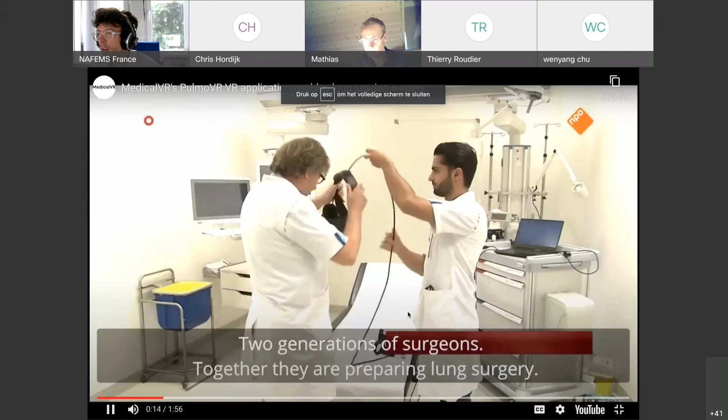So the basics, of course, is a CT scan, but it's more important to give you an idea of how... sorry for this. Maybe you can cut the sound, because it's hard to hear here. Yeah, perfect, thanks.

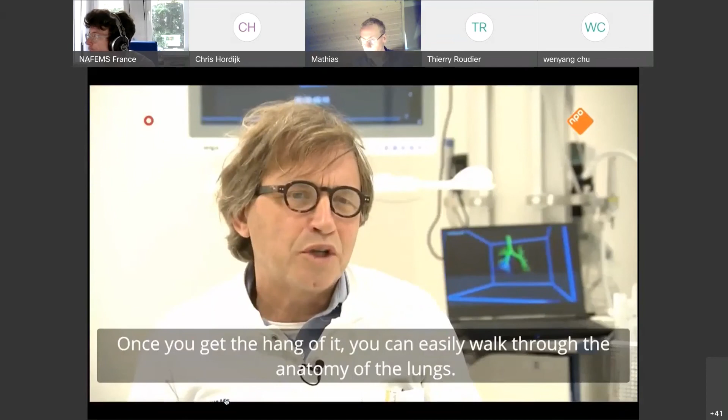It's most important that this is exactly what they're seeing. So in VR, they get a proper idea of how the tumor is located compared to the current procedure. This is the location of the tumor, and it also shows the other anatomic views.

The whole reason I asked to give this talk is that we're combining... sorry, so the main reason I'm asking for the stage here is that we're searching for other parties, in France or wherever in Europe, to see how we can combine specialties within DICOM, or other algorithms which work with DICOM formats or other types of medical information, for preoperative planning or for training.

We see that the technology for virtual reality combined with AI really steepens the learning curve for resident students, because it's a safe environment where they can practice and get a good idea of how the anatomy of a patient is built up. So it's a whole new setup of learning next to the operating room, alongside the classical way of books or videos.

So this is just a very short lesson. I think the philosophy was to drop an idea and to seek for partners.

For image processing, we saw MedInria before, that could be interesting to include in your own solution, segmentation algorithms coming directly from research teams could be included into your product. And for VR, I'd say VR plus simulation - we have a company working on this very specific topic, coupling simulation with VR, called Infinitech 3D. So don't hesitate to contact both of them.

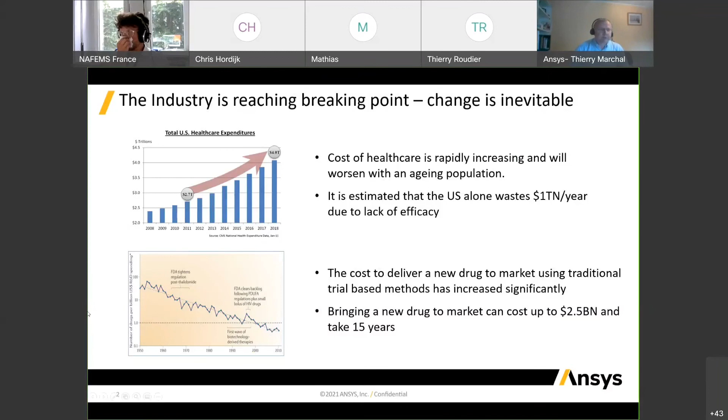I think that this kind of dramatic pandemic has been extremely useful, because it illustrated that this kind of in silico approach can be a key component in order to accelerate the process. This is not something completely new, because leading companies like Medtronic and others were already thinking that the in silico method was essential. We had to move away from this one-size-fits-all approach to a personalized situation. We need to complement in vivo and in vitro approaches with this in silico perspective.

Some of you may argue that although the healthcare industry is investing a lot in R&D, it is clearly a laggard in terms of simulation. Things are changing because of all what I was telling you, and it's quite clear that the healthcare industry will be catching up on that, starting this year. We can see that the investment in simulation and in silico methods is increasing at a CAGR year on year of 25 to 30%. So definitely, you are in the right place to invest.

What are they doing with all this in silico approach? We've seen that through the day-to-day. People are developing this kind of virtual human laboratory. We've seen models of liver, brain, heart, and so on, so that we can aid the environment and predict how a new device or a new drug will behave in this environment. People are pushing it further to do in silico testing and all the best practice that we can see in the industry and the academic world as well.

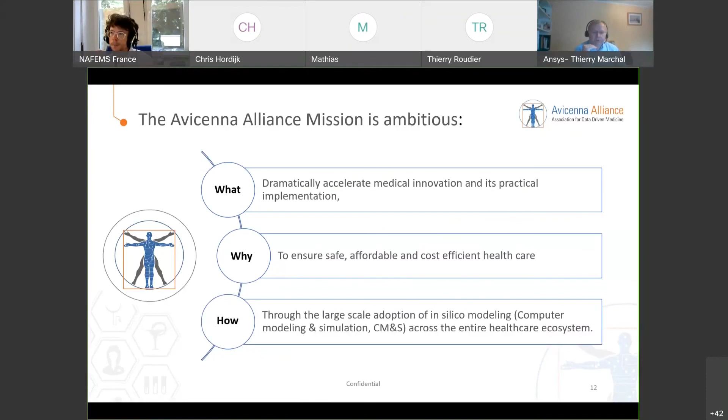We are joining forces, and you can see several of our members. I would like to mention people like Mathieu, Mark, Simon, and Christophe, who are part of the team today and who are very helpful. But we are not just working with all this academic network behind the VPH Institute and all this industry.

It's very important that we are also driven by key people like the regulators, so we're working and partnering with the FDA, the EMA, the European Commission, and also with standards organizations. As I said at the beginning, we don't just want to do research—we want to make sure this research can be directly applied and accelerate the process.

So what are we doing from there? This is leading to a new best practice, beyond innovation: a simulation-assisted FDA approval process. All the models you are developing, push them further than just research—make sure they can be used to accelerate the long and costly regulatory approval process.

This is a slide from the FDA itself, saying that this kind of digital evidence is a reality, provided it's properly validated. We will accept that. Some of you might say digital twins are a fantasy for the future—not at all. The FDA is saying that using a virtual patient for the regulatory approval process is a reality today. Digital twin is the near-term future, and we've seen today that this future is already happening as we speak.

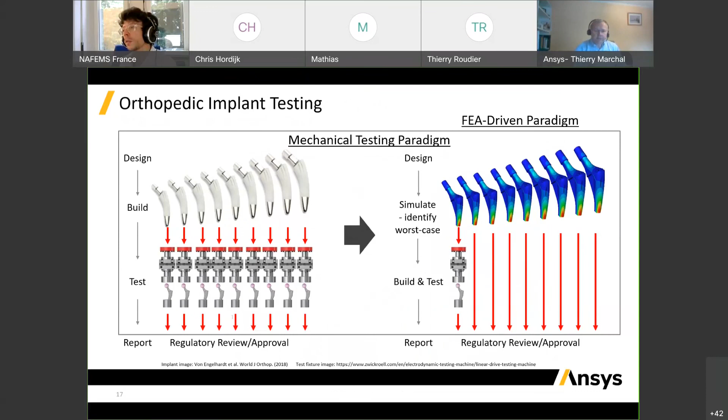For every single model, you need to do this very complex, time-consuming fatigue testing. But if you can identify the worst-case scenario through simulation, you just need to validate that worst-case scenario—if it's okay, then it's okay for the rest of the elements. But that's just for a simplified situation. What about the others? That's one of the key elements.

It's great to say we can use digital evidence for regulatory approval, but the key question every company or researcher will have is: how can I do that? What is the process? You can see on the left-hand side a document from the FDA, and now also from European authorities, saying that computational modeling and simulation can be used for regulatory approval.

How to do it? You can see the second document, the V&V 40 document published by ASME about medical devices, extended to pharma companies. If you want to validate fluid, electromagnetic, or structural modeling, there is V&V 10 and V&V 20. Then the last step, when post-processing the results, can be done under FDA guidance—Europe is lagging a bit behind on that.

Let me call on all these European people in this call here in order to make sure that we are pushing the ball and catching up on US people, making sure that we are doing that in the rest of Europe.

But more specifically, what do we need to do? We can validate a model. We need to define what is the question of interest, and for that, let's try to define the context of use of the computer model. Let's try to assess the risk. Is the computer model very impactful on this element? Is this kind of solution threatening the life of the patient? Based on that, the validation that we will be requesting will be defined.

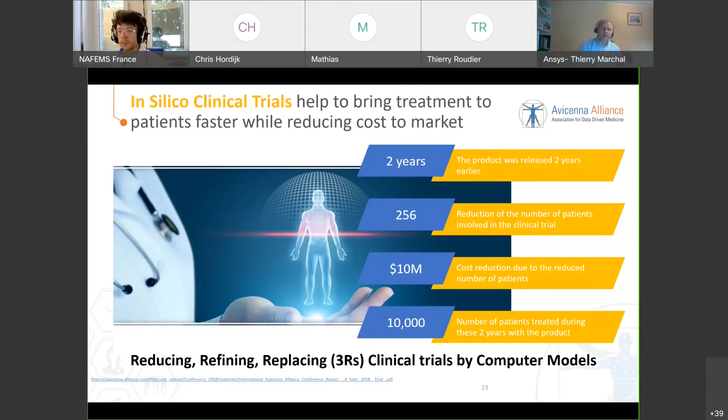That's one of the elements of how we can exploit all the nice models and research that you're doing. I'd like to stress another one, which is maybe more futuristic, but nevertheless a nice reality. And because this is NAFEMS France, let me take an example from the hospital of Poitiers here, presented by Kevin Aubert. You can find the full presentation online.

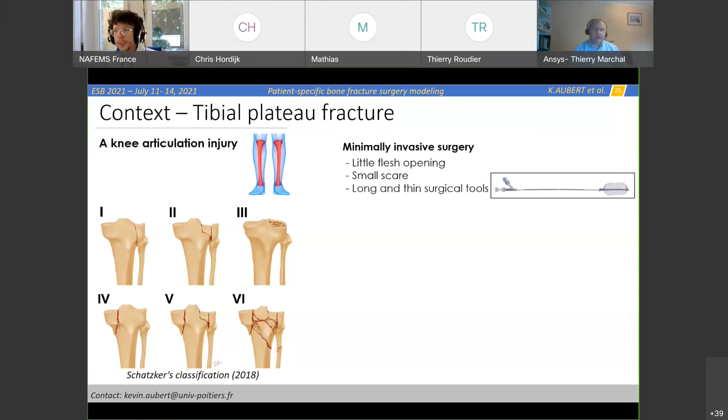These people are working on some kind of very complex situation where patients have an advanced, very complex fracture of the tibial plateau. And in France, in Poitiers, just be proud of that, they developed this new technology, tuberoplasty, where in order to put all the different components in the right place, rather than making a big opening, they insert a small balloon in order to guide all the components, and then they will be stabilized.

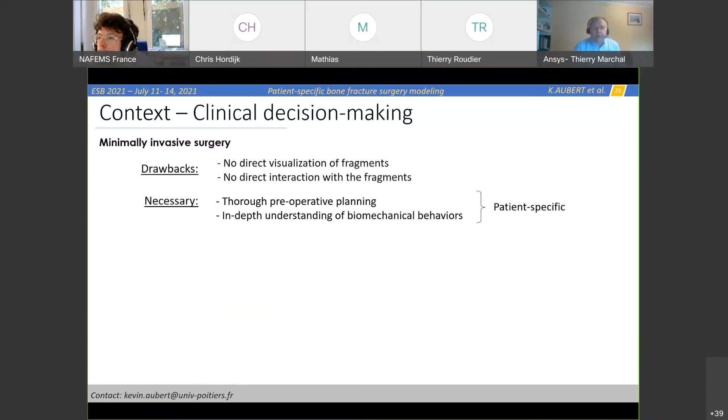The drawback is that for the surgeon it's very difficult. A small scar, great, but they cannot touch the fragments, they cannot see all these components. So that means they need to do a lot of preliminary work. In addition, people are different — they could have different kinds of osteoporosis, different kinds of geometry. So what are they doing?

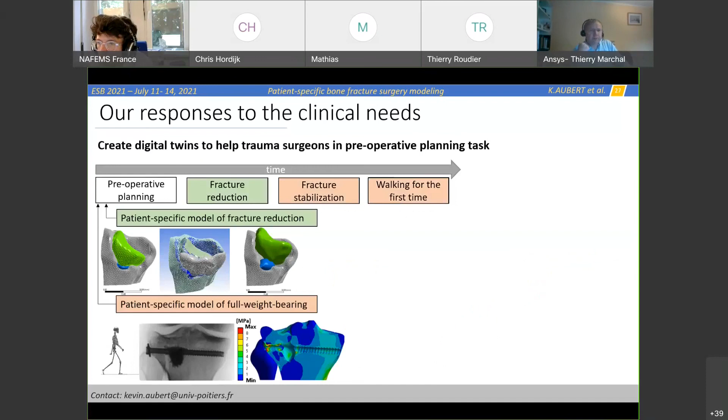In terms of pre-operative work, that's what I was mentioning to you. They create this kind of model in order to understand how all the different components will be moving under the balloon. And then they need to create this kind of patient-specific model for the stabilization. One of the key elements, which is always true for in silico work, is validation. Validate, validate, validate — compare with what's going on in reality. This is one of the key things.

Let me first focus on this first element. So they were working on this kind of comparison — a digital twin, a computer model of the tibial plateau, where they were introducing this balloon, and comparing it with reality, seeing that they get some very nice agreement.

Of course, they were doing some kind of parametric analysis. What is the position of the balloon? What will be the result happening here?

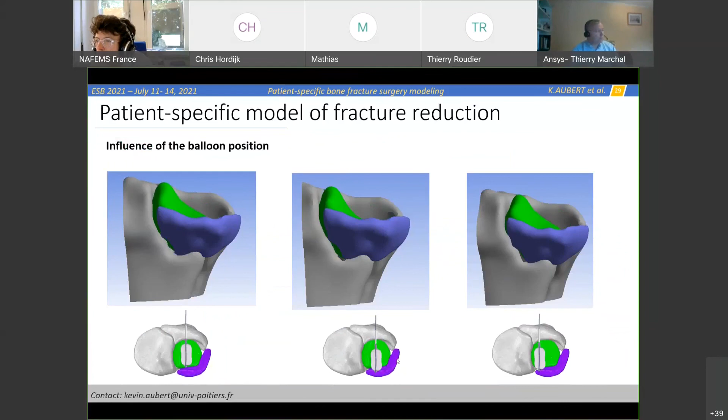The second step is this kind of stabilization of the process. And for that, once again, you've got several parameters: the screw, the length of the screw, the position of the screw. Do you want to add some cement or not, depending upon the position of the patient?

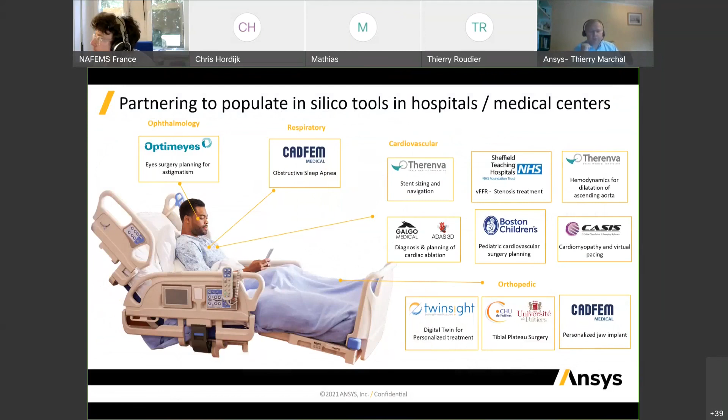And to wrap up, what I want to say is that this kind of in silico medicine is a proven technology. That's a reality. And by the way, we have no choice, we have no time. We need to move into this direction. But what is extremely important, we don't have time to compete. We need to work together. That's part of the Avicenna Alliance, where we've got some kind of pre-competitive collaboration.

We've got the technology. It is not perfect, but it already can save quite a lot of lives and improve the comfort of patients. Regulatory people are open to talk with us, let's take advantage of that. Clinicians are willing to go there. So what is missing for me is this kind of focus and priority. Let's make sure that we are going there full speed, and to make sure that we are going.